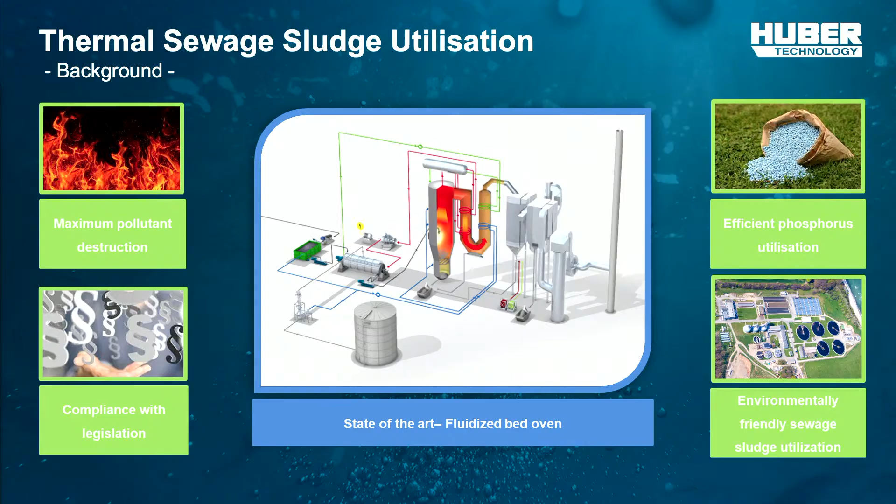And in the second step, you use the energy which is in the exhaust gas for preheating the air of the fluidized bed incinerator, and also for the drying of the sludge in the disc dryer. And of course, some harmful gases which are included in the exhaust gas have to be removed before the exhaust gas is released to the surroundings.

And the ash which is collected from the grid can be used as a fertilizer when it is processed in further steps. And the ash of the filter has to be deposited, because at the filter ash, which is a very fine ash, very small particles, the heavy metals like mercury agglomerate. Yeah, we can look into that a little bit further later.

And I know that the mono-incineration has been compared and investigated to other possible ways of recovering phosphorus. Can you please describe a little bit why mono-incineration has been pointed out as the best option for phosphorus recovery?

Yeah, the major point is the efficiency. If you take out the phosphorus from the liquid phase or from the sludge on the wastewater treatment plants, the efficiency never exceeds 45 to 50%. But if you use the ash from a mono-incineration plant, you can extract more than 80% of the phosphorus entering the wastewater treatment plants. Okay, yeah.

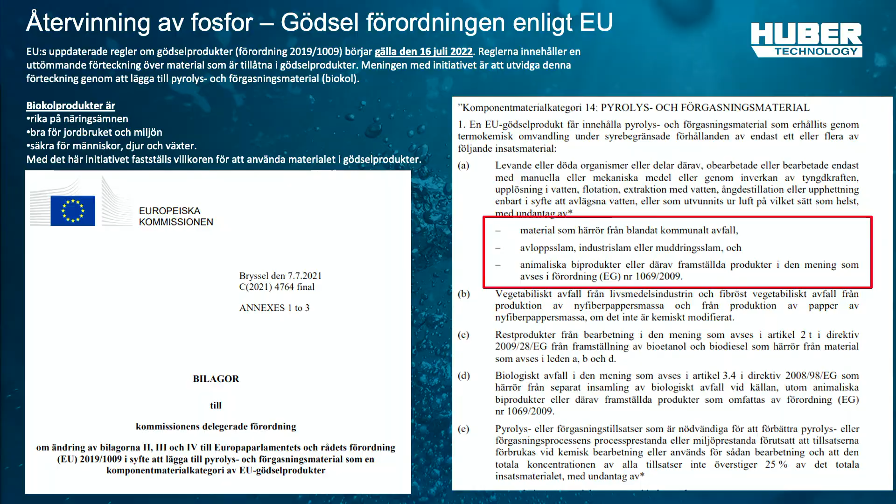Yeah, the sludge. The European Parliament have just amended their legislation on adding the pyrolysis and gasification materials to the EU fertilizing products. And municipal sludge and industrial sludge, also dredge sludge, have been excluded and are not allowed to be processed and then used in fertilizing products. Can you comment on why? Processed by pyrolysis or what? Yeah, exactly.

Sorry, I can only talk about the experience we have in Germany with pyrolysis and gasification units aside the typical incineration plants. The pyrolysis process is described by heating of the sludge while excluding oxygen. This process results in three different agents: the gas, a liquid phase, and a coke. And the coke still contains up to 30% of organic materials or carbon.

In Germany, a lot of examinations have been made with regard to the application of this coke, and it turned out that it is not comparable with the ash coming from the incineration plant, where the carbon residue is far less than 3%. As far as I know, there is no application of coke from pyrolysis for fertilizer up to now. In the German regulation for fertilizers, only the ash from the mono incineration of sewage sludge is allowed to be used as a fertilizer, either directly or in a processed form where further ingredients are added to get a full fertilizer.

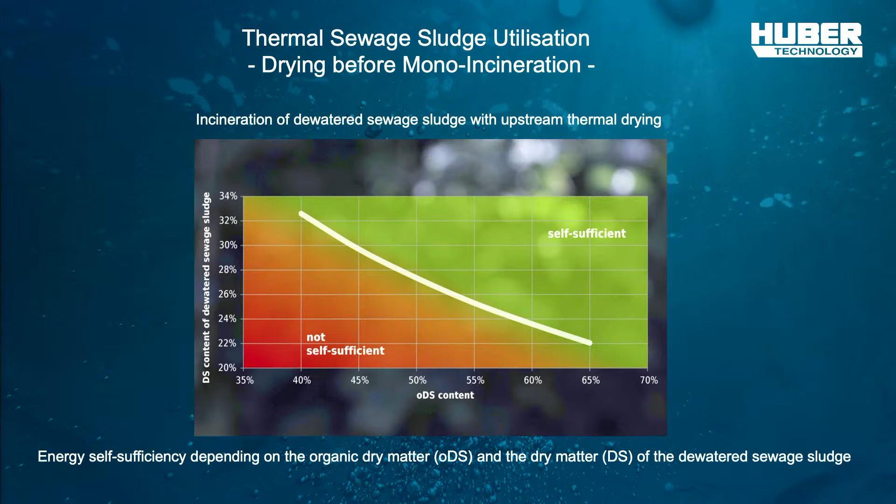Okay. So let's have a look at the fluidized bed oven. Can you just walk us through the different steps of the oven? Okay, you see this fluidized bed incinerator. It has a fuel supply for starting the incineration process, and you have to imagine you have a big mass of sand inside, and this is fluidized. That means heated air is coming from bottom to top, upwards, and fluidizes the sand, and only 3 to 5% of the mass is introduced as dried sludge.

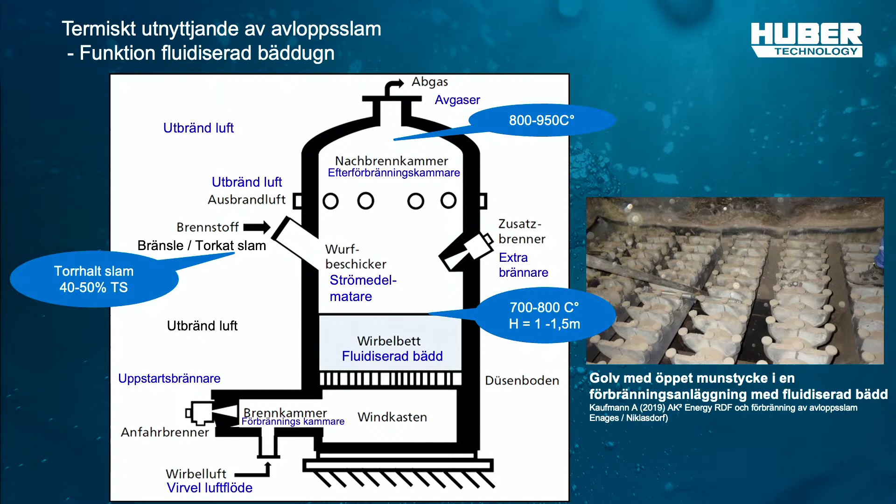And it is essential to keep these temperatures with regard to the gases in the exhaust air. You have to imagine sludge has some nitrogen content, and this nitrogen is transferred in the fluidized bed to N2O, nitrous oxide. This gas is harmful to the climate. It has a very big influence on the climate, and therefore it has to be destroyed in the headspace with higher temperatures. So it is of utmost importance to have two temperature sections with regard to the exhaust air treatment.

Okay, thank you. So what I will do now is give a short explanation of the whole sludge to energy process, which is what Albert was explaining before.

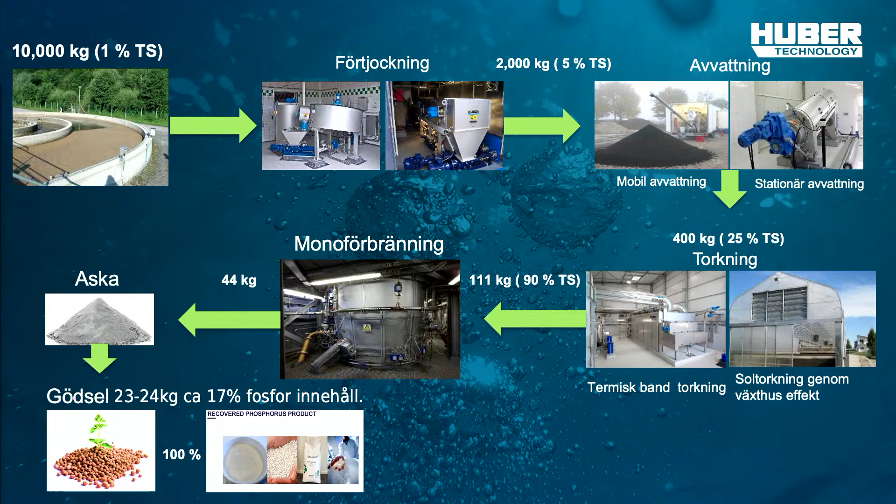However, at the same time, about 90% of the raw material for such productions are imported from the outside, and only 10% are located in the European Union, specifically in Finland. So this shows a really high dependency of the European Union on the import of phosphate rock, which together with white phosphorus has been added to the list of critical raw materials. And at the same time, phosphorus is a vital nutrient that has no substitutes and is linked to global food security.

And through the food chain, after being used as a fertilizer or feed additive for food production, it ends up in the wastewater and then transferred into the sewage sludge. So within the European Union, about 48% of sewage sludge is spread on the farmland in order to recycle nutrients from it. However, due to certain restrictions with the quality of the sludge and the availability of the farmland for the spreading, a large portion of sewage sludge ends up on the landfill or is being sent for thermal

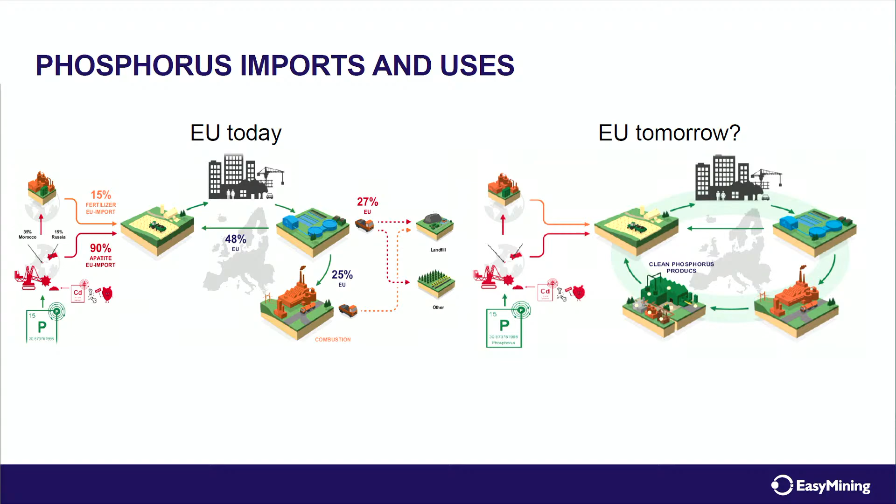Oh, very interesting. So can you shortly explain your process? Yes. So the Ash2Phos technology that has been developed in EasyMining uses sewage sludge ash as an input material for recovery and extraction of phosphorus and other elements such as iron and aluminium in order to convert them into valuable products again. So it starts with extraction of the elements in the acidic step where they are leached from the ash. And in this step, the first product is being produced, which is called silicate sand.

This is an ash residue which has a lower content of metals and of phosphorus compared to the ash itself, and it makes it a more suitable product to be used in the construction industry, either as cement replacement or as sand. Okay. Yes, and other elements that have been leached from the ash are then separated in the alkaline step into intermediates that can be converted into the final product. So iron and aluminium are recovered as iron chloride and sodium aluminate, which are quite known on the market as precipitation chemicals for water treatment and can be returned into the water treatment plants.

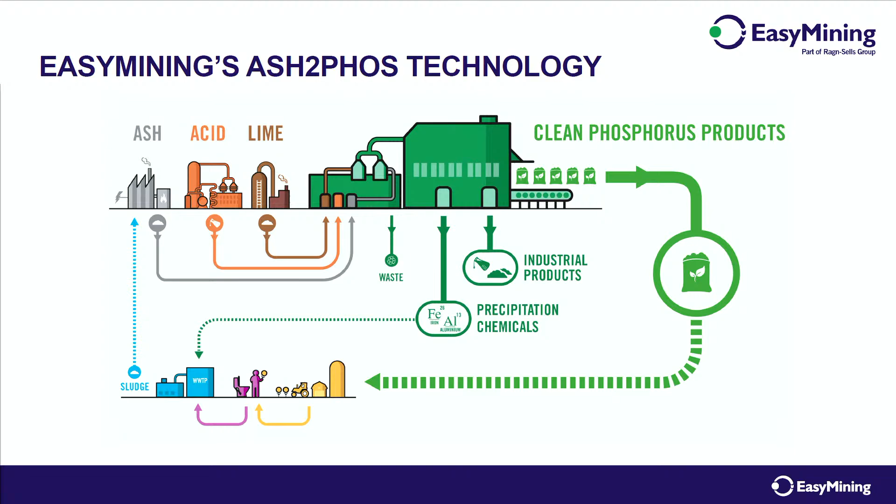While phosphorus is being recycled as precipitated calcium phosphate, that is also a known product on the fertilizer market, so it can be used as a fertilizer. It has also a similar chemical composition as apatite that is originally used for the production of fertilizers and feed additives, so it can be used as a substitute for such productions as well. And hopefully in the near future it will also be able to be used as a feed additive itself.

And the important point is also that while phosphorus concentration in the ash increases, so does the concentration of heavy metals compared to the sludge itself. So when such processes are implemented, it's important that they are able to detoxify the final phosphorus product and separate the heavy metals that are being extracted from the ash into a separate stream, prevent it from following the phosphorus product, and in this way the waste reduction is achieved.

Great. It seems like the whole circle, and you are actually recovering a lot more than just the phosphorus. Yes, indeed. So we are gaining back a lot of materials in this way. Yes, and as I understand, the incineration takes away the medical residues and also the microplastic, which is also good. All right, thank you very much.

And what kind of projects do you have ongoing at the moment? Well, currently we have two projects based on Ash2Phos technology ongoing. One of them is a plant to be built by a joint venture between the company Gelsenwasser and EasyMining in Schkopau in Germany. And for this project we have completed the basic engineering and are now in the process of applying for the environmental and building permit.

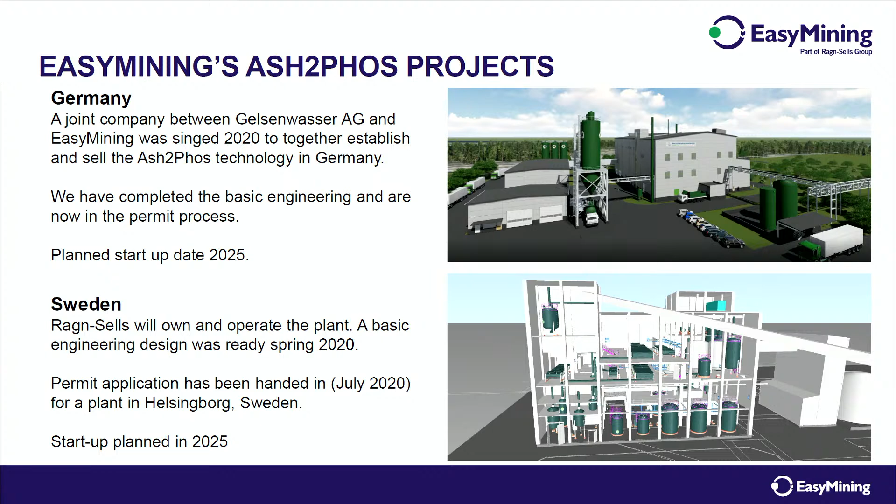Okay. And the second project is for the plant that will be fully owned and operated by Ragn-Sells, and it is to be built in Helsingborg. We are also now in the process of waiting on the permit decision, which is supposed to come back by the end of this year. Okay. All right. Perfect. Thank you very much.

Thank you. So, Nina, I think we are about at the end. Maybe we should see if we have some questions.